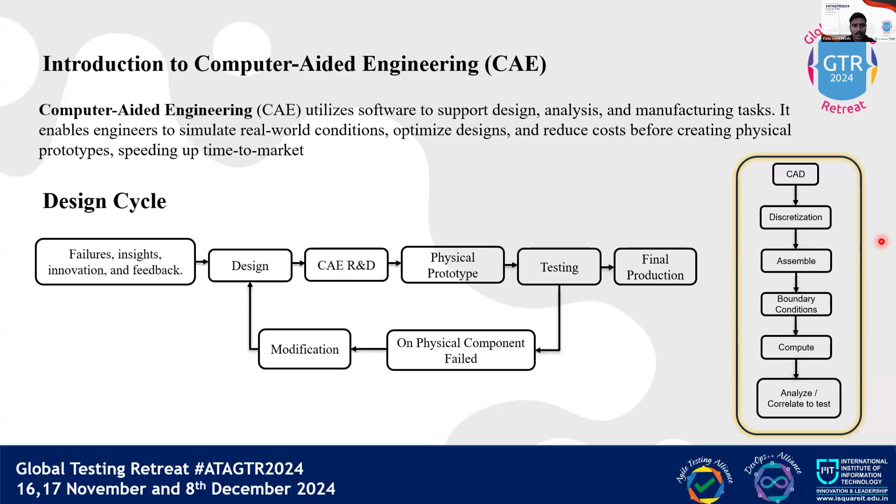We determine whether the design is ready for a physical prototype, or needs changes at the CAE stage itself during simulation. If it works fine in physical prototype testing, it is ready for final production and released. But if the physical component fails, modifications are made to the design, and we request changes with the CAD team. This is the overall life cycle of CAE, the process of how testing happens in CAE.

Now, let's talk about some of the key techniques in CAE. There are various methods and techniques, like using simulations and performing testing in the automotive industry.

There is analytical testing, analytical method, where for smaller components we can perform hand calculations, and the accuracy will be more here when we are performing hand calculations. In that case, we can use analytical method.

But for larger components, we need other methods, like numerical method. Under numerical method, there are various techniques like finite element analysis, computational fluid dynamics, multi-body dynamics, thermal dynamics, noise, vibration, and harshness calculation analysis. So there are various techniques involved here.

In finite element analysis, we use this to analyze the structural integrity of the vehicle and durability of each component. There are various analyses we can perform, like stress analysis, crash analysis, durability analysis, fatigue analysis, etc. We will be seeing all these things in some time.

Now, computational fluid dynamics - let's say fluid, as it says, we can consider fluid as either a gas or a liquid. This fluid flow in a vehicle, to analyze this fluid flow, we can use computational fluid dynamics. There are different formulas to calculate the different parameters, which I'll explain in detail in upcoming slides.

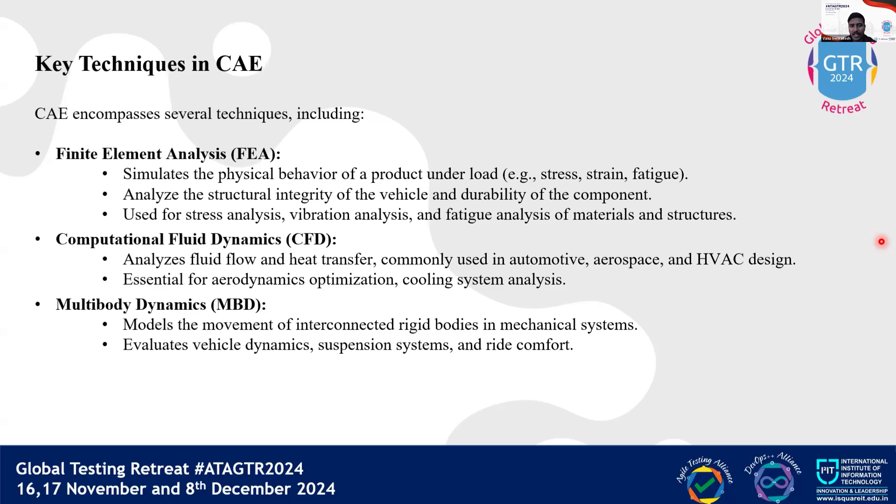Now, I want to explain in detail, or Abhijit will be explaining in detail, about how we can use the finite element analysis technique to model some of the examples which we'll be seeing, and how he is going to correlate the results to optimize the design. Abhijit, over to you.

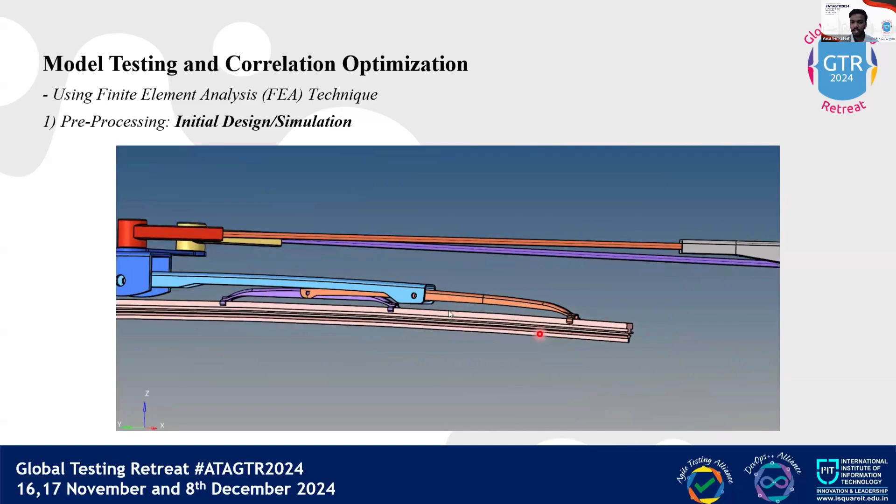This car wiper has multiple components, as you can see here. It has some holding brackets and guiding brackets, and wiper is also there, arm and holding bracket is also there. You can see the blue one is the guiding brackets, and the yellow is the wiper, and arm and holding brackets are there.

These are multiple components, and each individual component will form an assembly. For calculating the performance of this component, we have to discretize into finite elements, because each and every component has infinite degrees of freedom. We have to discretize into finite degrees of freedom.

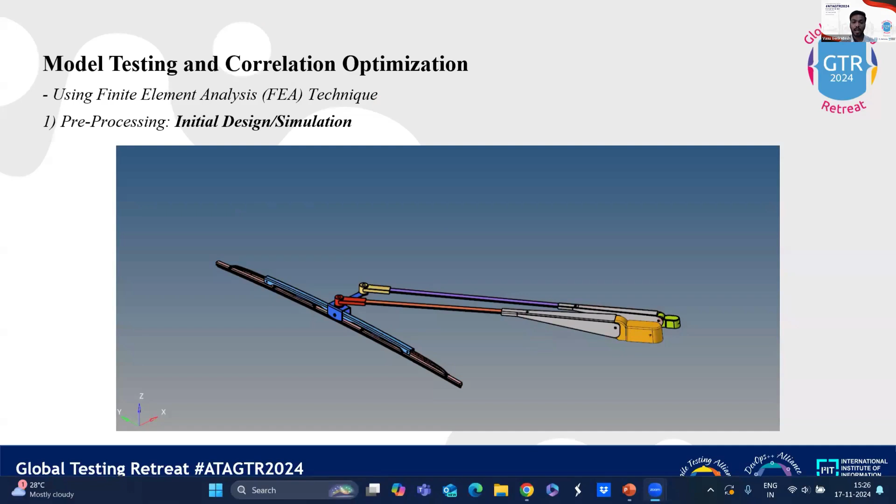You can ask, why we have to make them from infinite to finite, and why we perform structural analysis. If we are designing a new design, it should have some design parameters and some criteria, based upon which it will operate. In the similar way, in optimizing the performance of a component, natural frequency is the basic design criteria which we will calculate before designing a new design.

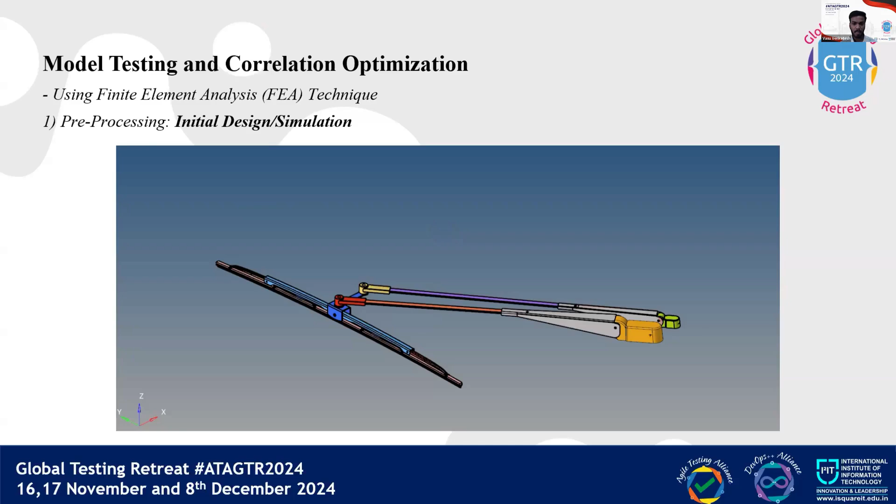Next slide, Vasu. Okay, this is the first stage. As I said, there are three stages in the FEA technique. This is the first stage, known as the pre-processing stage.

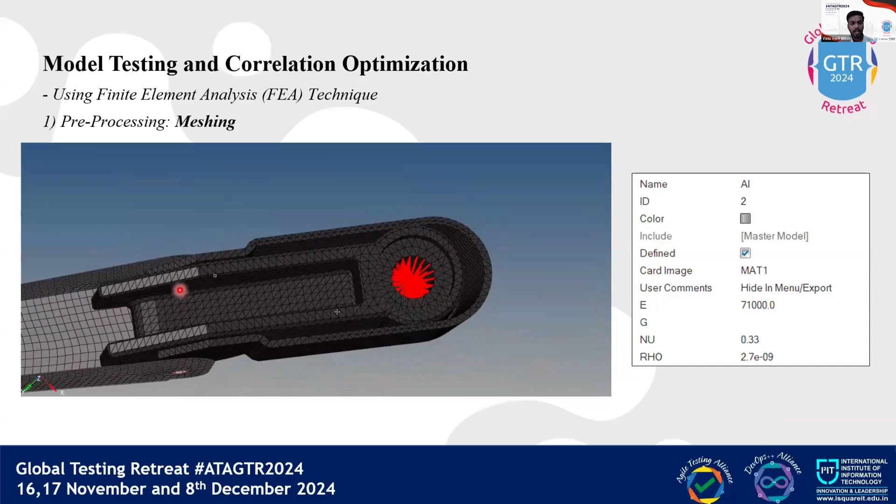You can see this is not the CAD - this is the exact model of the CAD, which we have discretized into finite degrees of freedom. Each and every part has been discretized, and the next stage is we have to assemble each and every component into a single assembly.

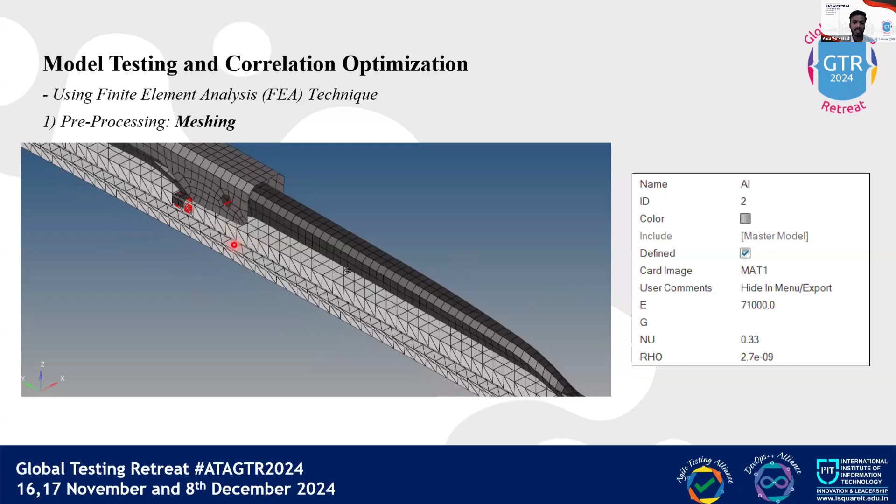These car wipers are assembled with bolts and screws in real life, but we have to know how to perform this in simulations. Here we have just connected with 1D beams and some rigids we have used. The red zones you can see are those screws and bolts which we have assembled based upon the CAE simulations. These red zones will replicate those contacts, and each individual component will form an assembly.

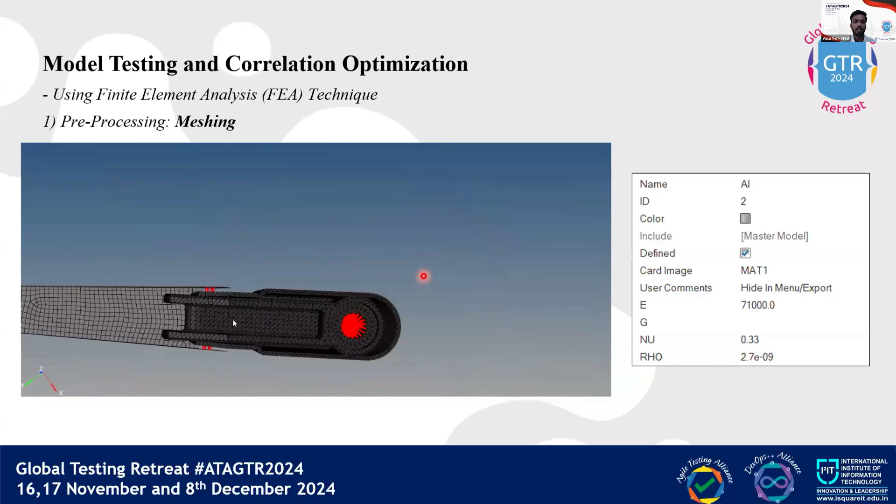After creating those things, we have to assign those materials. Why do we have to assign? Without assigning, it won't calculate those calculations - that we will check in the upcoming slides. Right now, on the right hand side, you can see I have assigned aluminum material for this arm, and after assigning, we have to give some material properties to those materials.

That is the Young's modulus - E is the Young's modulus of the aluminum material, nu is the Poisson's ratio, and rho is the density of the aluminum material, which will define the mass. Mass means the weight of the component. Next slide.

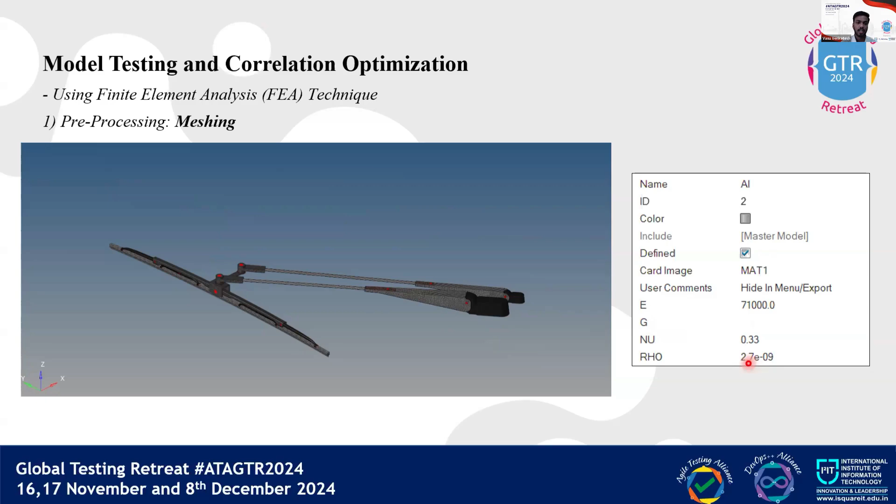And this is the second stage of our CAE technique, which is the solving stage. Here, to find out the natural frequency in CAE, we are using certain methods. There are the Eigen Lanczos method and AMSES, which is the automated multi-level substructuring eigenvalue solution method. We have used the Eigen Lanczos method, and this M·ü + K·u = 0 is the general governing equation, based upon which the solver will solve.

We have assigned those material properties, as I said, the density, which will be defined from this formula. And on the right hand side you can see Fn = 1/(2π)·√(k/m), which is the formula for the natural frequency. With this formula we can do hand calculations for a simple structure, but take a wiper: it's a complex structure, so while calculating its performance we can't calculate with that simple formula. Hence, as I said, on the left hand side we are using the Eigen Lanczos method.

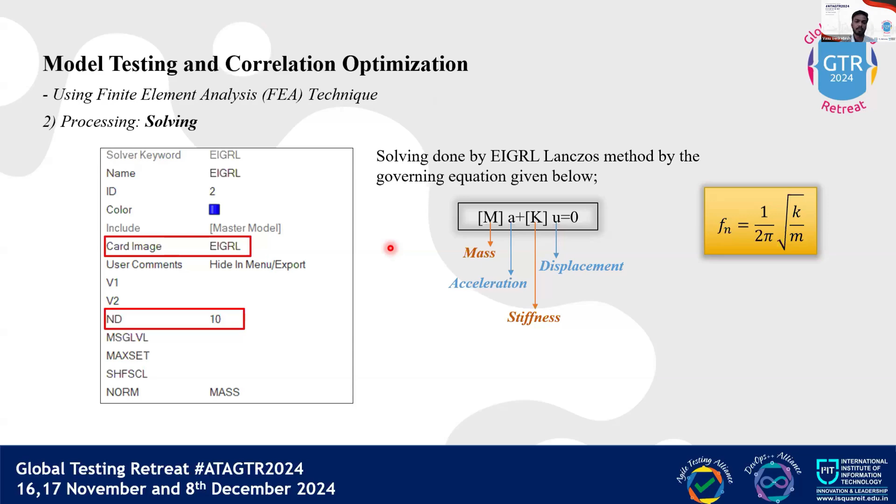From here, I'm going to remind you of one concept. While you are designing any component, let's say, as Vasu said, a handlebar, wiper, helmets, airbags, every component will have n number of natural frequencies. For checking purposes, we have extracted only the first 10 natural frequencies of the component. After setting up these setups, the software will simulate and we will get the results in post processing, which is the final stage of the CAE technique. This post processing we will view in HyperView.

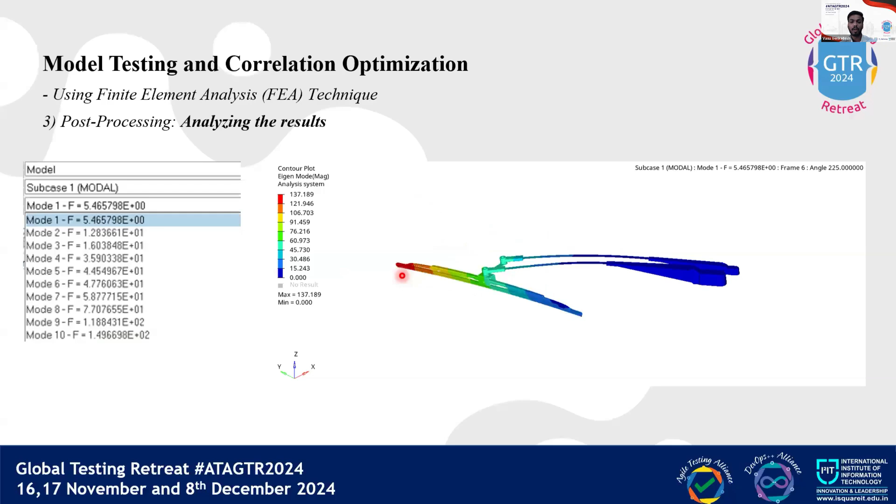As I requested the first 10 natural frequencies of the component, you can see them on the left hand side. With these frequencies, a CAE engineer should know which will be the critical frequency, which will be the critical modes, and which will affect the real life performance. Go to the next slide.

That is the first mode, and this is the second mode. Based upon these mode frequencies, you can see in the image at the top right corner that the mode shapes are varying. As the frequency varies, the mode shapes of the component will also vary. We have to know which will be the critical one.

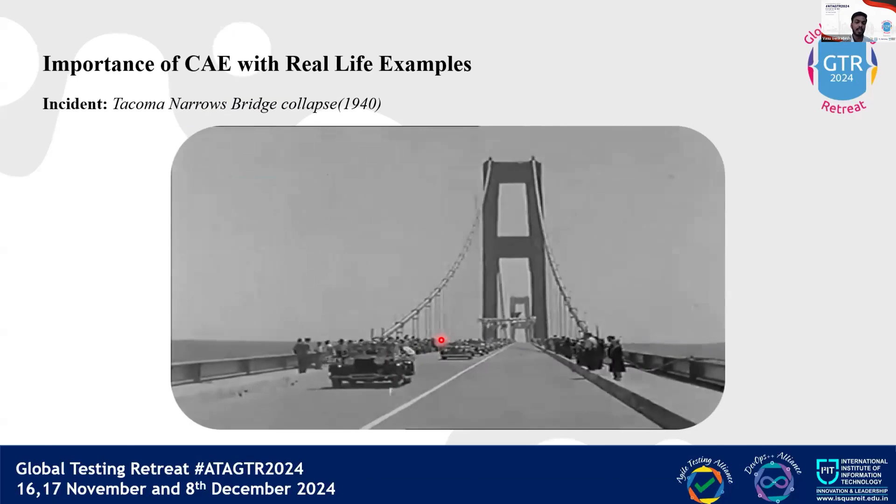To understand this concept more, I will go with a real life example, which is the famous Tacoma Bridge collapse, which occurred in 1940 in the USA. You can clearly see in this video. They designed this bridge for certain limitations, keeping the natural frequency up to the limit. But after opening, it got excited more because of the wind interaction. You can see in this video clearly, it is flexing more. Why? It has some natural frequencies, and after interaction with the wind, it gets excited. So we are getting two frequencies there, natural and excitation frequency. Because of those frequencies, we are getting resonance.

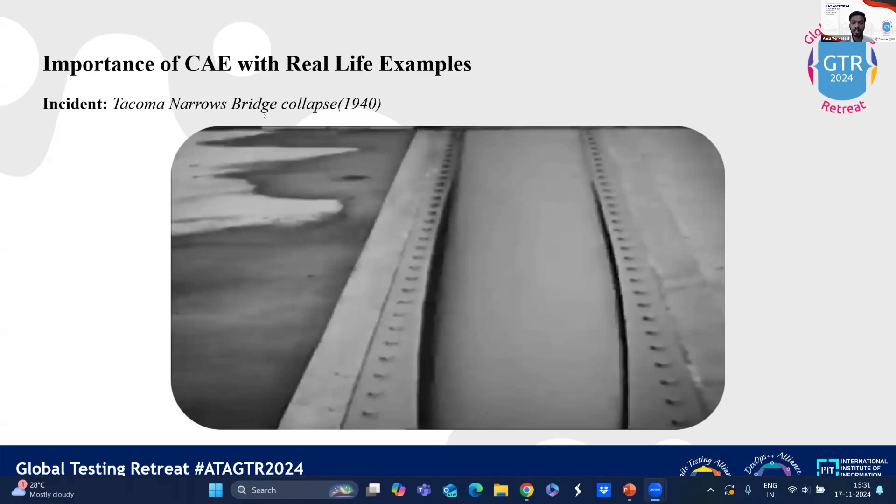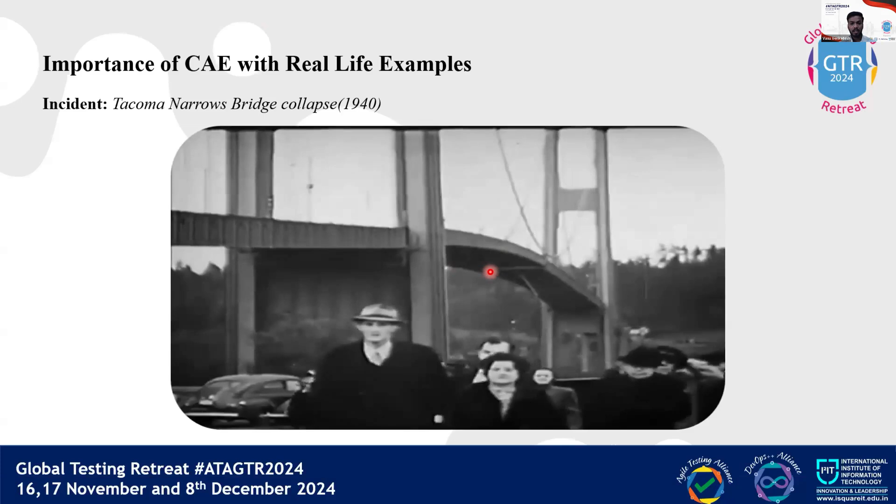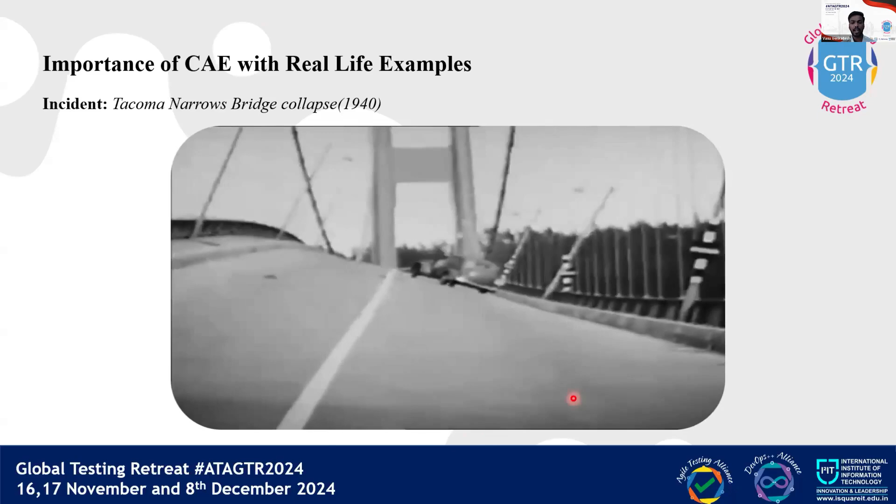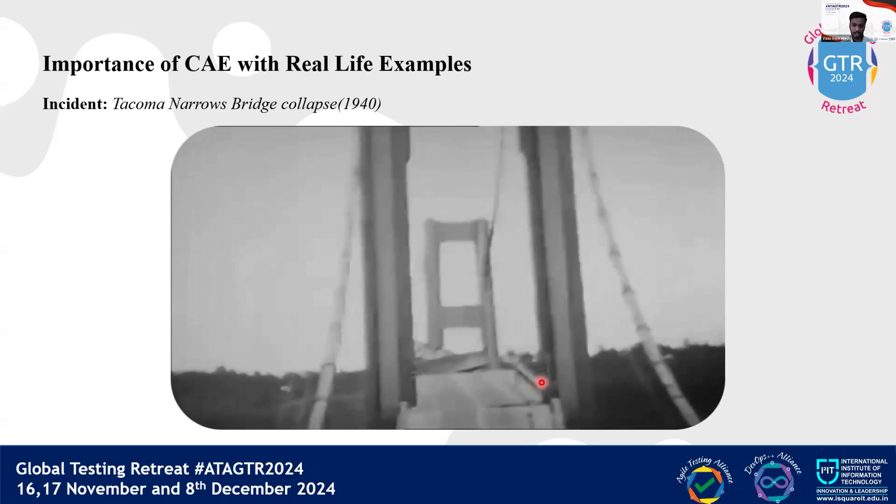Resonance is nothing but when the natural frequency meets the excitation frequency, we will get a higher amplitude; that is known as resonance. If resonance occurs, it will definitely result in component failure. You can clearly see in the videos. At that particular point, the resonance occurs, and finally the bridge collapses. This is exactly what happens in real life, and that's why we have to check those natural frequencies. As I said earlier, natural frequency is a basic design criterion while we are designing a component. You can see here, it's breaking, right?

And we can't alter the excitation frequency because it's not in our hands. It depends on the load acting on it, but we can optimize the natural frequencies, because the natural frequency is based on our design and the material we choose. Hence we have to check those things. These are the reasons for the failure of the bridge: as I said already, wind interaction causes the excitation frequency, and torsional vibrations. This is the twisting mode, which is really the critical mode for the bridge.

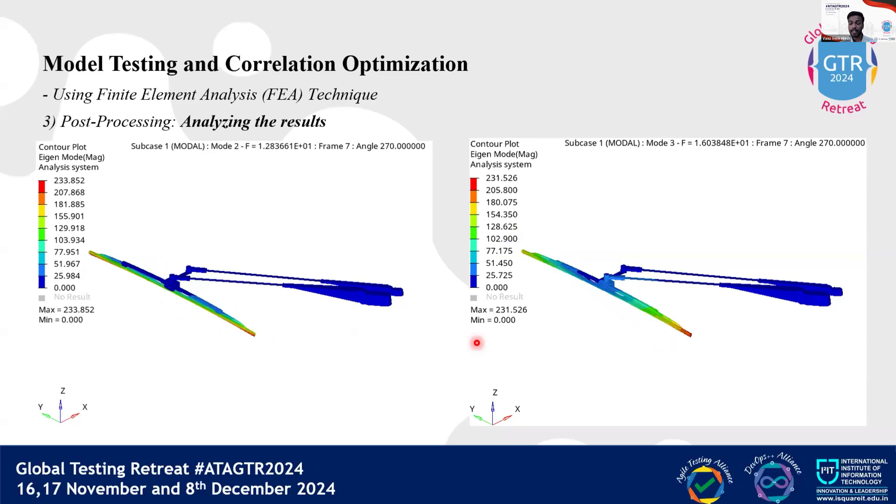Vasu, can you go to the third previous slide? They can understand more. You can see in the third slide, mode 3, it's twisting, right? This will be the critical one for the wiper, and the frequency is also only about 16 hertz. So we have to optimize better to increase this frequency. Yeah, you can go to the next slide.

And that's how we are optimizing the performance of this vehicle component. Next, we can look into how we are optimizing safety by looking at a simple example, the helmet. This is one example.

This example I have modeled and dropped the helmet from a 1 meter height to check the stress concentration region. Just assume if an investor is going to invest some money in producing some helmet, he has to invest in materials and he has to invest some money in the labor charge, etc. After investing, at the final production, if he is getting a poor quality of helmet, what is the use of investing? So we can't change. Many things are lost, right? Money, time, everything as a resource has been lost.

So if we are using the CAE simulations, we can alter the material by changing those material properties as I defined earlier. As I said in wiper, like that we can change in this process also. Here I have assumed PA6 material for the outer covering and dropped it from the 1 meter height, and I check the stress concentration regions. In the third image, you can see at the fillet region, it shows some red zone.

If I'm not satisfied with those values, I can easily change the materials by changing those densities, Young's modulus, Poisson's, or whatever the things I said earlier. Like this, we can optimize the performance of each and every single vehicle component, and we can improve the strength of a component. Next.

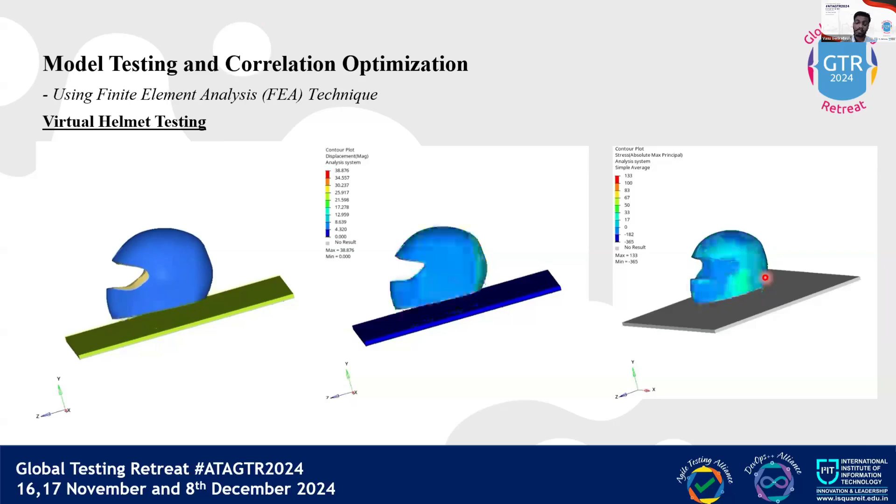Hello. Yeah. Yeah, audible. So let me walk you through a few of the features and benefits of CAE. Yeah. So using CAE tools. Also, you're not. Hello. Sorry, guys, there is some trouble with Abijith's laptop.

So imagine a world where AI handles repetitive simulation tasks for you. CAE tools powered by AI are already making that a reality by optimizing the designs faster than ever and reducing manual errors. This is a revolutionizing approach for product development, allowing engineers to focus on innovation rather than a regular process. It's also allowing users to come up with a new analysis perspective using AI and cloud platforms.

Now, think about the power of collaboration. With cloud platforms, engineers can work together in real time, whether they are in the same room or on different continents. And the best part, access to virtually unlimited computational power improves the analysis time and gives faster simulation, seamless teamwork, and better outcomes as well.

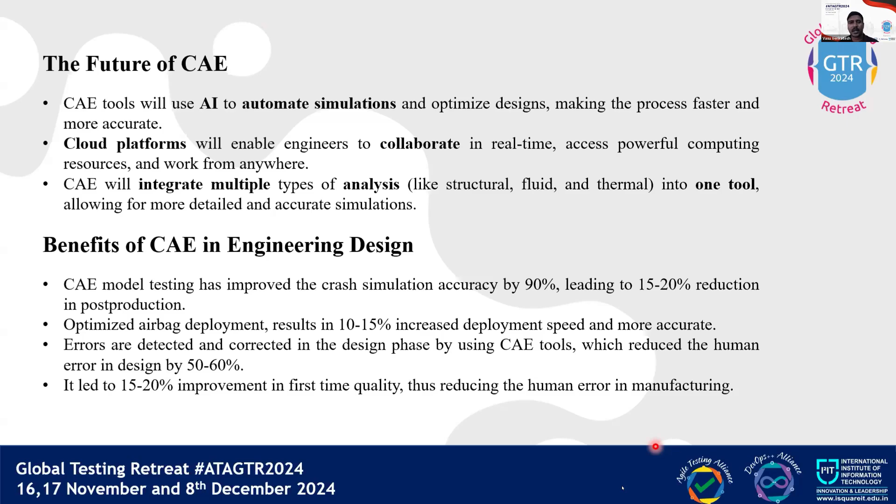So that's all. It is a very deep topic, but I just wanted to give a very high level view of how, using CAE tools, we are simulating or mimicking a physical prototype, how effectively we are calculating these results, and analyzing various possible uncertain situations which are nearly impossible to test in the real world. So if there are any questions, we are good to take them.